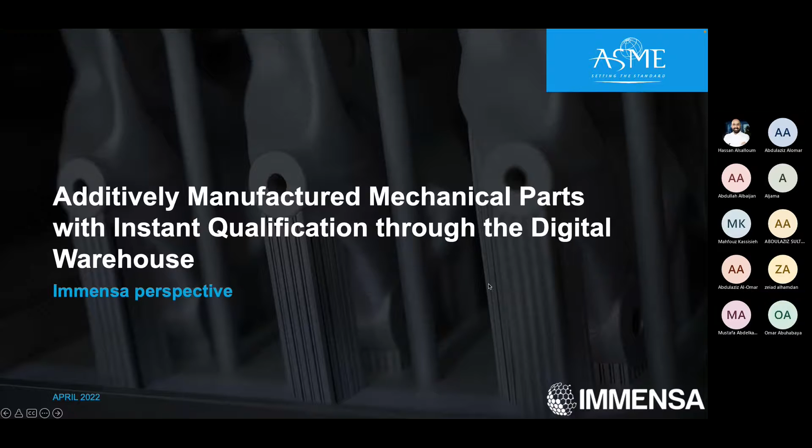If you give me access, Abdulaziz, to share my screen so I can proceed with the presentation. I don't think I have that privilege in Teams yet. Okay, Mr. Hassan, please. Hassan, can you hear? Okay, perfect. The floor is yours. Perfect, thank you. Okay, please confirm if you can see my slide. Yes, it's clear. Loud and clear. Okay, perfect. Thank you, Abdulaziz and gentlemen for attending our session today.

Today I'll be talking about the additively manufactured mechanical parts with instant qualification through the digital warehouse. And just to go through the agenda, we will be starting with Immensa's additive manufacturing introduction and the perspective on digital warehousing. So to kick off with the introduction of what's Immensa and what do we do as a service. So we mainly have three different streams of services that we offer to our clients. It starts with the engineering and design services. The other one is additive manufacturing on demand, and the third one is basically the digital warehousing, or what we call a digital inventory.

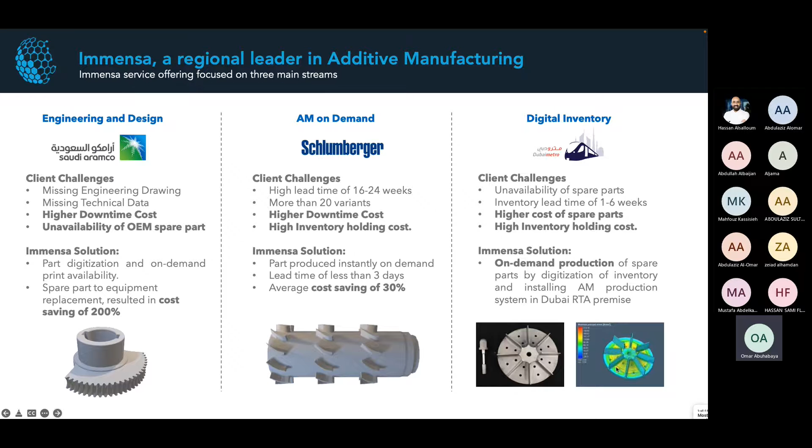So we have a few use cases and examples of each and every service that we provide. For example, recently we executed a project when it comes to digitization or reverse engineering. A client had missing engineering data and technical information, the cost of downtime is very expensive, and the part was not available as a spare part with the OEM. So the solution that Immensa provided is basically we took the damaged and defected part, we reverse engineered it, we converted it into a digital format that is ready for manufacturing, and later on we installed it in that digital library to be ready for manufacture whenever the client needs it on demand.

And also a recent project that we worked on with Schlumberger is basically a part where the lead time of manufacturing with the conventional way takes 16 to 24 weeks. And again, the downtime is too costly, and to keep that part in the inventory is very expensive. Luckily, with this specific case, the end user has the digital files that are ready for manufacturing. So what we did is basically manufacture the part with additive or 3D printing on demand, and it took us less than 3 days. The cost saving on that part was 30%.

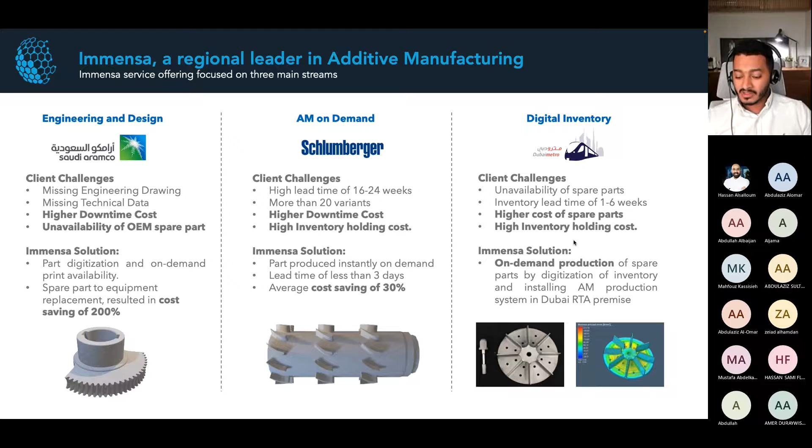And when it comes to Immensa's global on-demand spare part platform, we're trying to partner up with strategic partners and strategic manufacturers, especially when it comes to material development, machine and technology development, software, and creating applications, be it metallic or non-metallic. So we have our footprint around the region when it comes to our partnership. We also have facilities that are spread in the region. Our biggest facility is in Saudi, based in Dammam, where it contains both metallic and non-metallic capabilities. We have another two facilities in the UAE, one based in Dubai that is purely focused on polymer, and the other one in Sharjah,

where it's focused on metallic application, and also we're setting up in Egypt and Iraq, mainly for digitization and application creation. Also, we have an office in the States that is connecting OEMs to our platform and bringing in parts to be manufactured locally in the region. We're also ISO certified. We have 4 different ISO certifications, be it in quality, environment, health and safety. We also have the first additive manufacturing oil and gas certification from ISO.

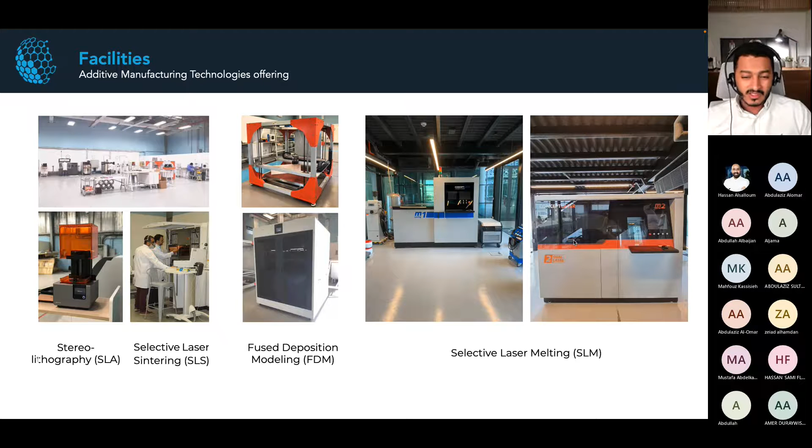In our facility, as you are aware, there are a number of additive manufacturing and 3D printing technologies. We're talking about 7 different technologies, and within our premises we have around 4 to 5 different techniques, ranging from SLS to SLA to FDM and SLM technologies. And we're considering adding different technologies such as WAAM and binder jetting, but that will come in the future.

Just to give you a holistic view of the process of additive manufacturing, how it works and what the value chain of the manufacturing process is: basically, we start with material. There are 500 plus materials available for additive manufacturing, especially when you talk about metallic materials. And there are a variety of machines with different sizes and different applications.

Later on we go into the design, and designing parts for additive is really crucial. There are many ways you can design a part with optimized features to leverage the benefits that additive manufacturing can deliver. Once we finalize the design stage, we take the part into simulation, where we simulate its mechanical properties. We ensure that the part is operationally fit and up to the standard and qualification before it gets manufactured, through CFD and finite element analysis.

Later on, we take it into the parameters, and creating parameters for additive manufacturing is a whole different ball game. It's a know-how by itself. Creating parameters for each different technique is really crucial, especially when you talk about material; each material has its own speed and laser power. In some cases you might require a heated bed, so it varies from application to application, and you also consider the environment where the machine is being operated.

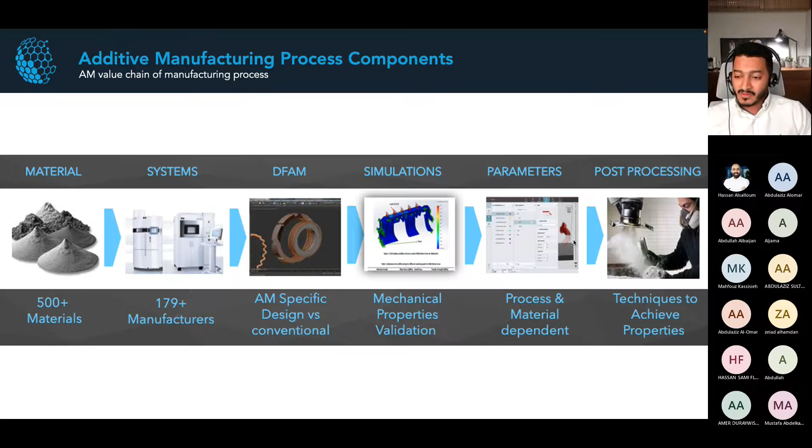We'll give you a few examples of parts that are printed at our facilities. Here is a boat propeller that was printed out of stainless steel 316L. This part is now being replaced, and since it's a critical part, you cannot really wait, especially when it comes to maritime and logistics, where timing is really crucial. So we digitized this part and have it ready to be manufactured on demand using additive manufacturing.

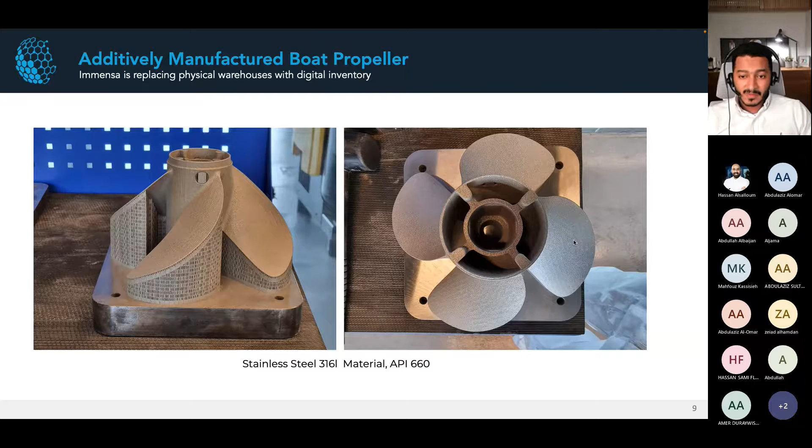Here's a short video that gives you an idea of how 3D printing works, especially when you compare it to the conventional way. Instead of taking a physical material and carving it out, it's basically a powder. You have a powder bed, and this is a single technique called SLM, selective laser melting, where you are melting layer by layer using a laser power of 400 watts, and stitching these layers together, as you can see in that short video.

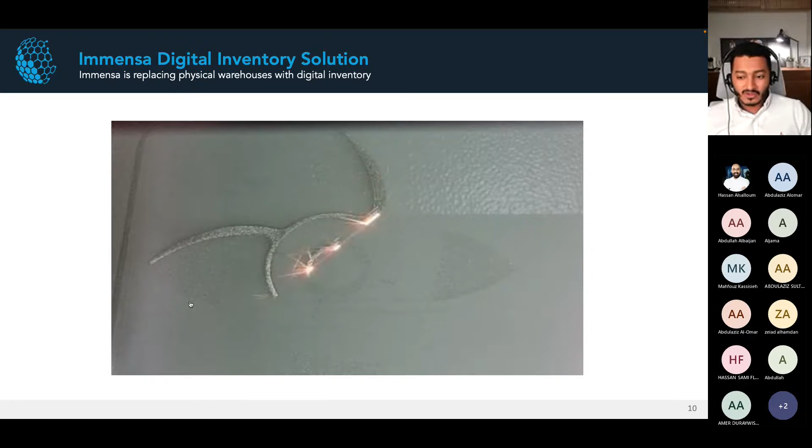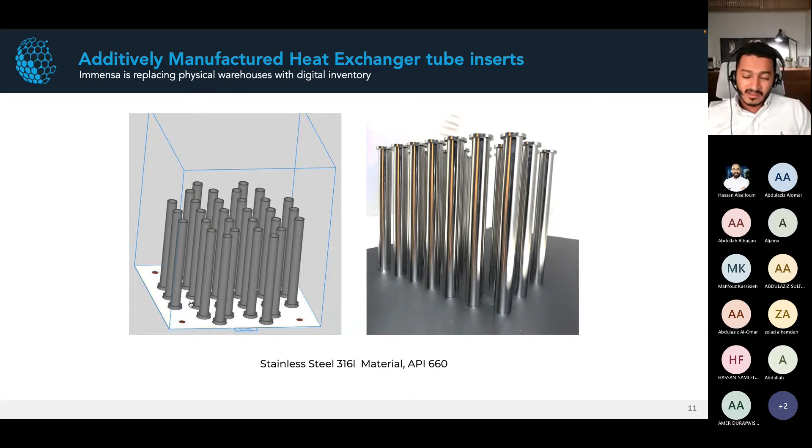This is another application that is relatable to the oil and gas industry. It's a heat exchanger tube insert, also called a ferrule, used to protect the tube sheet from corrosion and erosion. These parts get replaced frequently, so we have it digitized and ready for manufacturing whenever it's needed. We're also considering upgrading materials, converting this from metal to non-metal. High performance non-metallic material could really extend the lifetime of such a component.

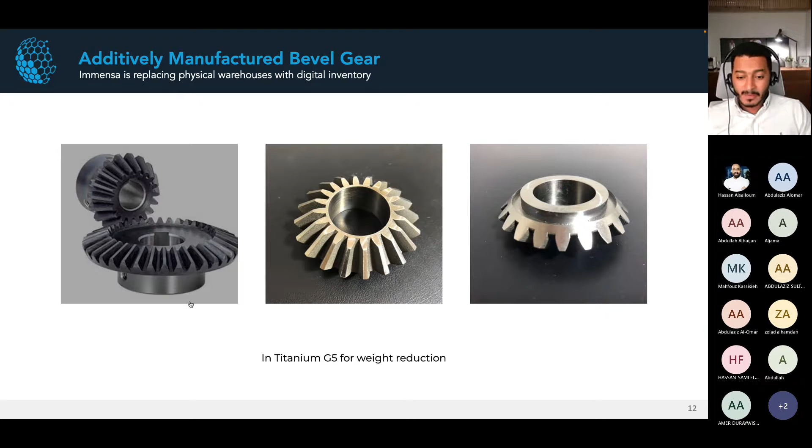Here's another application: a gear that was printed out of titanium. The weight was reduced quite significantly in this case. And this is one of our favorite use cases of additive: impellers, a rotating part that is really critical and takes a long time to be manufactured conventionally, in some cases 6 months to a year, especially when you create a mold and then cast into that mold. That process is quite lengthy.

So what we did in this case, we scanned the defective part. We created a digital engineering design that gives you all the parameters, dimensions, tolerances, and what have you. We performed the simulation to ensure that the part is designed accurately. And later on, we performed the heat treatment and the post processing.

Basically activities, and once that is done, we conduct the testing and validation to validate its performance. And normally what we do in this case, we create testing specimens to conduct our mechanical testing of tensile and compression. It depends on the requirement and the standard that we're complying to.

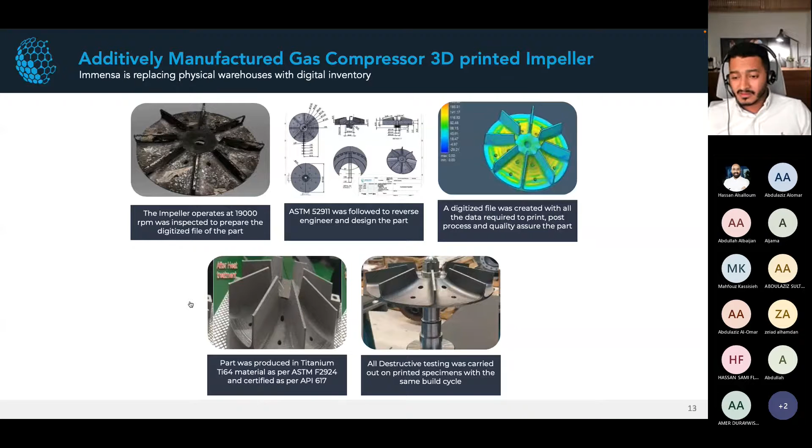Feel free to interrupt and ask, especially when it comes to these use cases.

So now let us jump into the digital warehousing, since it's the core of our presentation here today. So how do you select parts that are suitable for the digital warehouse? Because not everything is replaceable with the digitization process. You need to be very, very selective, and there's a process and guidelines that we comply to when it comes to choosing parts that can be digitized in our digital warehouse and printed and produced on demand, either through additive or conventional way of manufacturing.

What we're focusing on is basically having that part produced in a timely manner, on the most effective and quality that is demanded by the end user. So the process or the flow of our DIS, or the digital inventory solution, basically starts with the assessment, qualifying the parts that are useful for digitization.

And once that qualification is done, we take it into the digitization, creating a digital asset and converting the physical part into digital format. And there are different ways and streams of doing that, and we'll come into that later on. And once the digitization is completed, we start creating the digital asset and ensuring that the digital passport contains the relevant information that is ready for manufacturing.

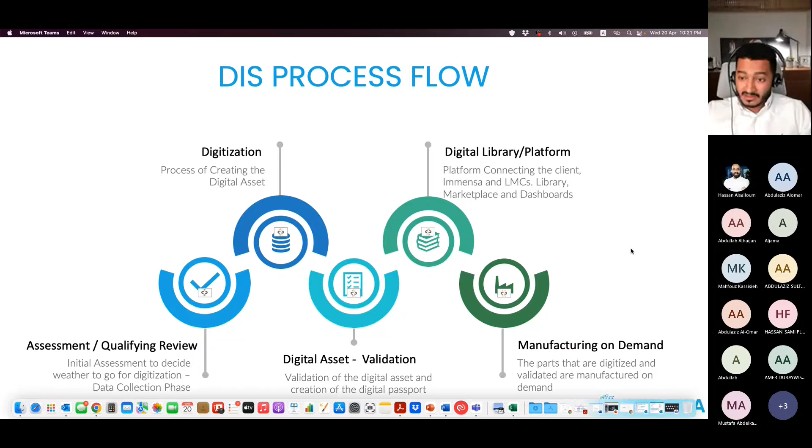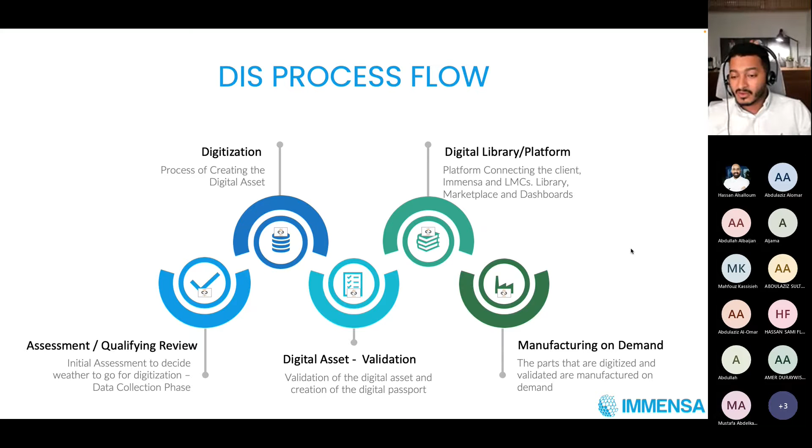And once that digital asset is ready, we take it into the library to be digitized and stored and manufactured whenever it's needed. And once the digitization and the storing of the file is done, we produce the part whenever it's needed on demand. So let's take it one by one and start with the assessment.

So the assessment starts with evaluating the technical information and seeing what data is available either with the end user and OEM, seeing what information we can obtain from the end user or we can create and allow our application engineers to work on it, to identify the materials, the specification of the part, the geometry, and getting the part engineering drawing out of that physical part, and also understanding the commercial side of it.

Getting to know how this part is performing commercially. Is it high value? Is it low value? What's the cost of it not being available in a warehouse? How much is the client suffering if that part is not, and what are the logistic costs? So getting this commercial information data is really crucial to understand whether the part is suitable to be digitized.

And then we conduct our own analysis and scoring, and we have a whole mechanism that scores that data and gives you the outcome of A to F, where A is the part feasible for digitization, and F is not really. And the way that we collect information is based on a number of data. So we can either integrate with an ERP system and massively upload parts into the platform, or we physically collect the parts. And as mentioned earlier, we reverse engineer it, and we take that technical data out of it.

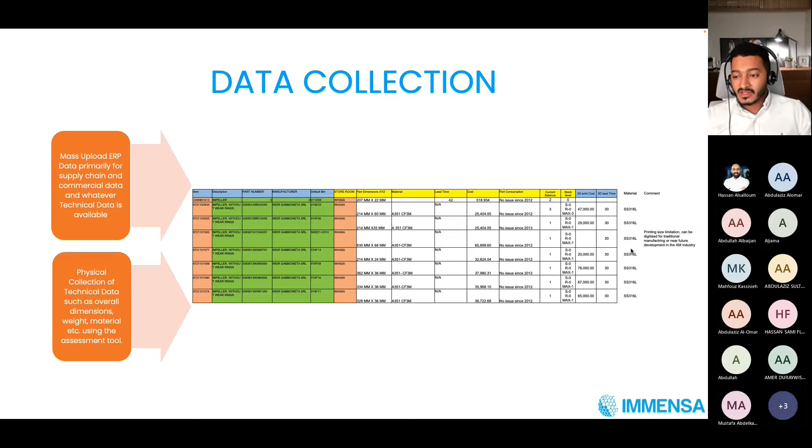And the information that we extract and create as data is basically a description of that part that shows what type of part it is. As you can see, we have impellers, the part number and the original manufacturer of that part, the storage location, the dimension of that part, the material, the lead time, which contribute to the commercial side of the analysis, the cost and the part consumption annually, and then later on we compare it to the cost of additive manufacturing if we decided to produce it with 3D printing, the lead time of additive manufacturing, and the proposed material as an alternative.

So we collect that data and then we analyze it through our data algorithm engine, and it builds that category of scoring the technical and commercial side of it. And the scoring, as just mentioned, goes from A to F based on technical feasibility, commercial, and data availability. So we start with A. If it's A, then the part is suitable technically and commercially. If it's B, technically not feasible, but commercial data are available.

Perhaps technical data is available but not reachable, where you have to convert that part into a digital file to create that technical information, but commercially it's available. C is where technical availability is there but commercially it's not. D, you don't have sufficient technical data. E is basically insufficient commercial data, and F, both technically and commercially not feasible.

So these are the categories we come up with that ensure visibility when it comes to part selection, because not everything is suitable for digitization, and you need to be very careful when you select parts that are convertible from physical to digital format, ready for manufacturing on demand.

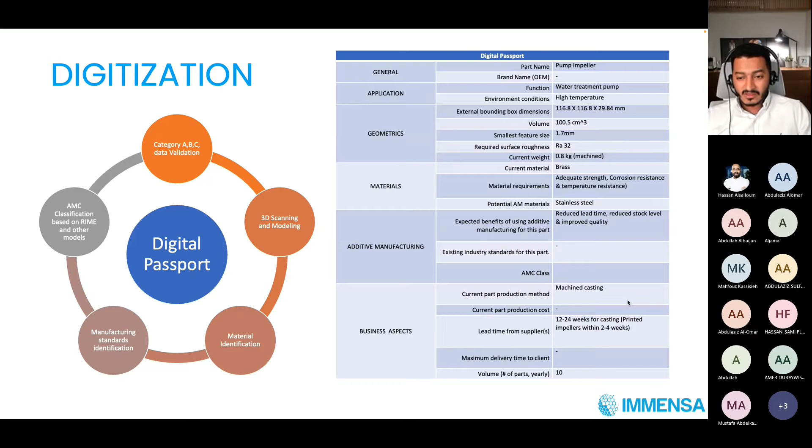Classification - is it A, B, or C? We have three different classifications. Each classification categorizes the material based on its crucial application and testing requirement, which we'll come into later.

So the digital passport contains the technical information we come up with to ensure the part is ready for manufacture whenever needed. We have the geometry, material, manufacturing information, and the business aspect of it. That digital passport is contained in each and every part we digitize.

So let's say we have thousands of parts that we digitize - we have 1,000 digital passports, one for each and every part. It has its own specific data information that allows it to be manufactured on demand.

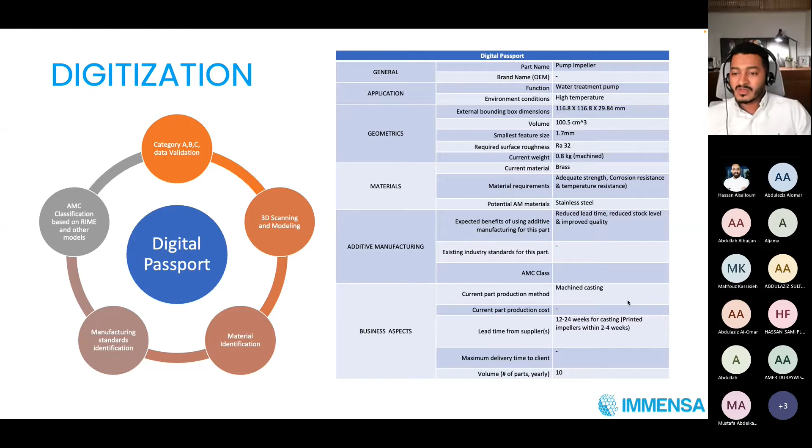Then we come to the scoring and creating, as I mentioned, the AMC 1, 2, and 3 catalog, where we basically certify the material based on its crucial application. One is basically a component that needs to be printed and tested to verify its digital assets. Two is basically no requirement for testing, but you will have to test the coupons.

Testing coupons ensure that the part is produced as per the specs. And finally, the third AMC is no need for testing, which in so many cases means that part is not really critical.

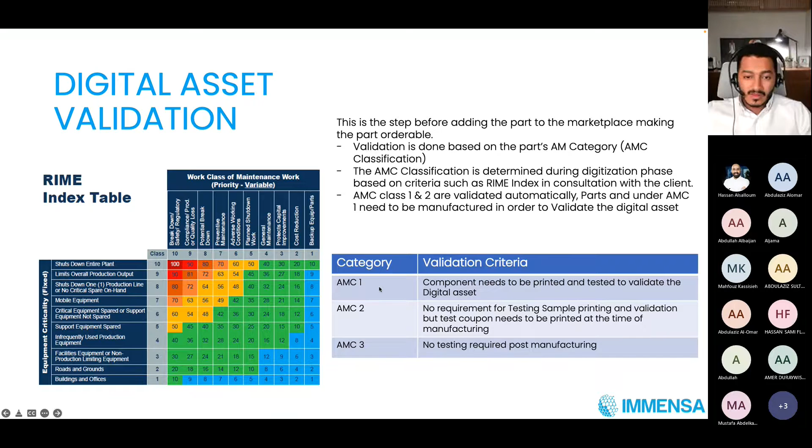So the on-demand manufacturing basic workflow, just to give you a full picture: our clients raise an RFQ through the DIS solution. The RFQ gets distributed either in-house, or if the capability is not available, we send it to our network and partners of manufacturers. Our client receives a quote with a lead time, and later on we select a vendor, and then the order gets placed.

A client directly places the order, and if a vendor and the price are ready and validated for the product, the vendor confirms the order, and we have the manufacturing done as per the digital passport information created earlier. Later on, based on the AMC category, we get the part tested and qualified, and then a report will be generated. Once that part is completed, it gets sent to the end user, including the testing and certification.

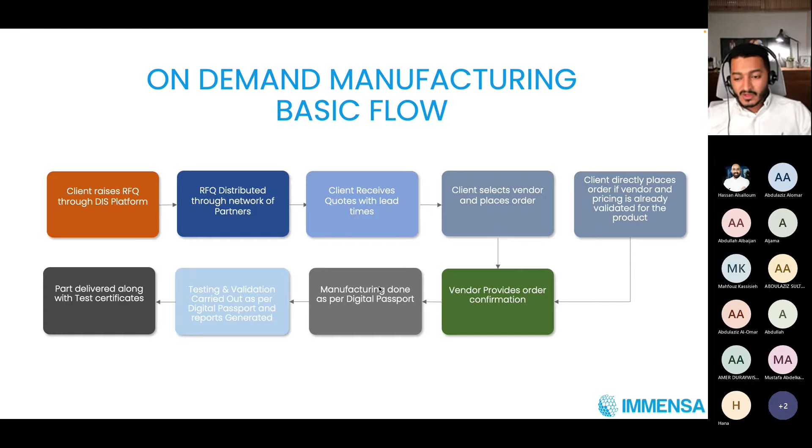So that was my full presentation. Feel free to ask any question. Thank you.